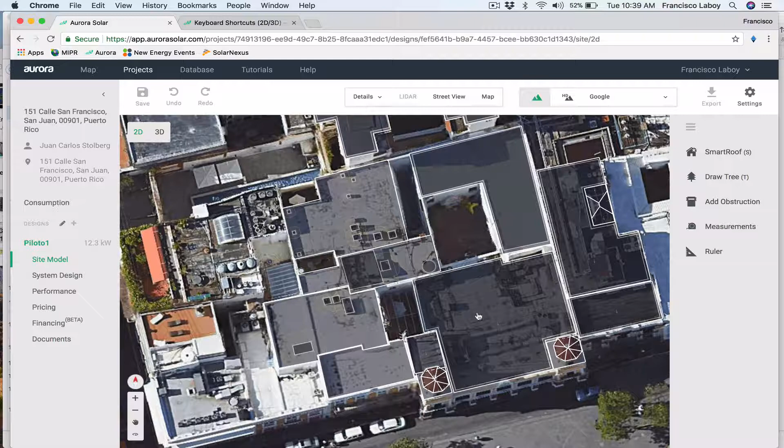This is an aerial view of Piloto, this area here. The areas in gray are the different buildings or sections of Piloto. This is the lobby patio, this is the central patio, this is another one, and there's another here. This is the next door neighbor with his internal patio, and this is city hall, if I'm not mistaken, with the towers here.

What you see here are obstructions: air conditioners, the cage area in the middle, and the water cistern. We also have poles with cables, which we'll work on to make sure they don't become an obstruction for the system. This is the new big power generator, which isn't shown on this aerial view of your building, but we're making sure it's part of the equation.

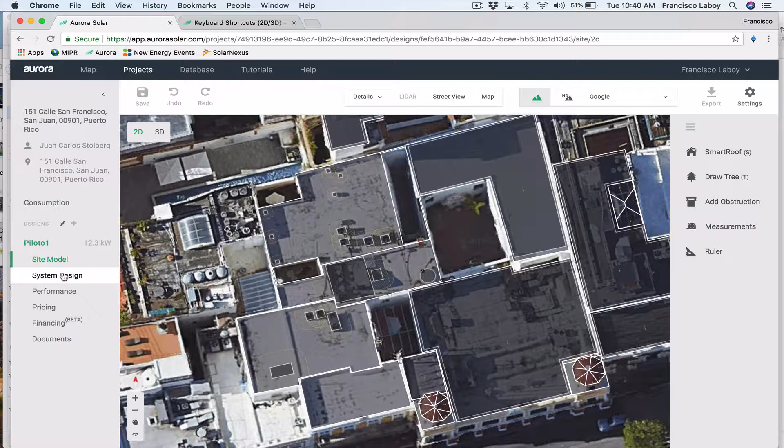Now I'm going to go into the actual design of the system. I'll show you the irradiance map. As you can see, we have multiple buildings around yours, and the reason we put these buildings here is to account for any shading situation at different times of the day and different times of the year.

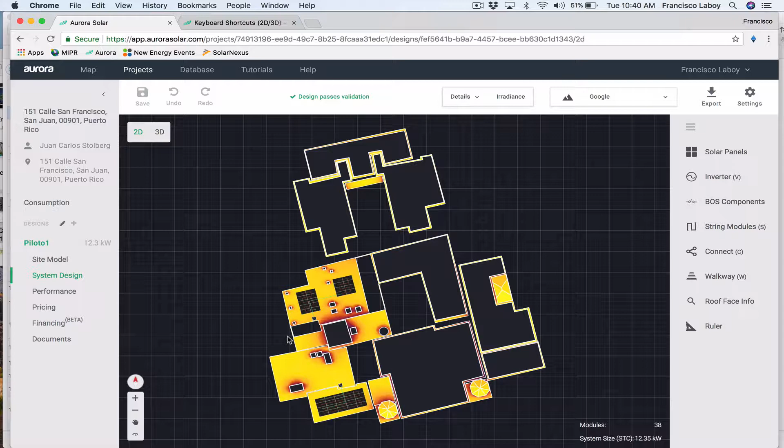As you can see, we're showing very clearly what your building looks like - what area your building covers, the roof, all the different areas within the roof, and all the different obstructions like the air conditioners, smaller conditioners, pipes, generators, cistern, and the cage area. They're shown in black, with shading around them.

Depending on where I put the cursor, this map gives me the irradiance for each individual square meter. So as I move the cursor here, I'm going from 1,788 kilowatt hours per square meter per year, and the closer I get to those shaded areas, that actually goes down.

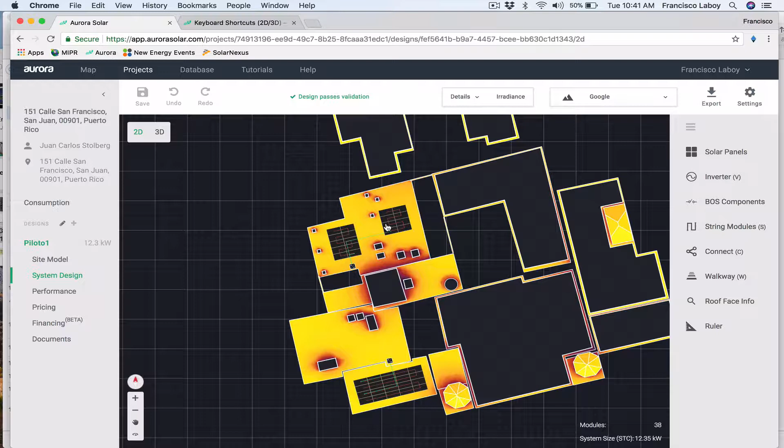So we need to make sure our panel system, the solar array, fits in areas that can use the most out of the energy generated from the roof. We have three different arrays, totaling 38 panels, about 12.4 kilowatts, using 325-watt panels. The biggest array is in the front, in the southernmost part of the building, right in front of the plaza. The other two smaller arrays are on the back side and the north side of the building.

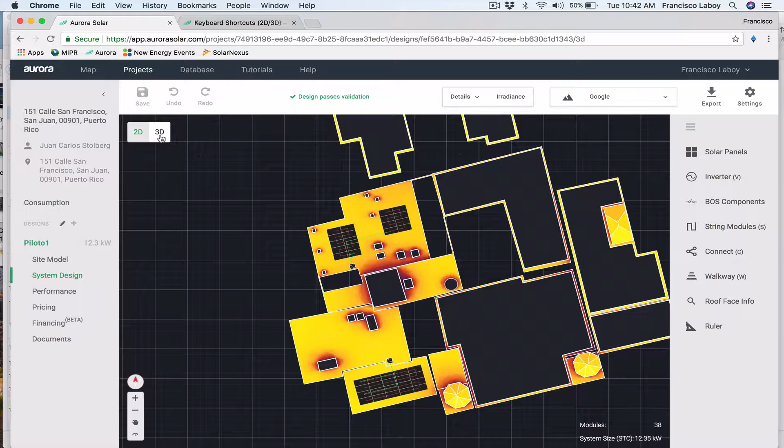Now if I go into the three-dimensional view of this project - give me a second, it's coming up - it will show me a set of information that's very useful for understanding the impact of the system based on the design and positioning of the array. It also lets you understand the physical impact of the different buildings around you.

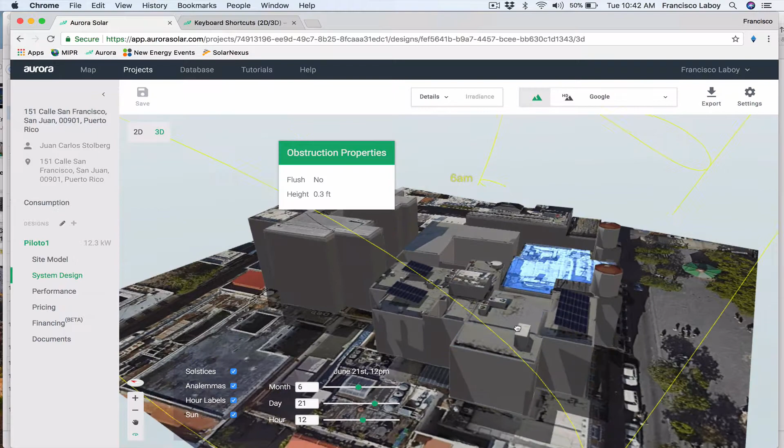As you can see, you have a building right behind you, which is about 6 stories or so. You have another one a little higher than yours here, but not that high. And this one further to the east is a little bit higher. But they don't constitute any shading issue, to be honest.

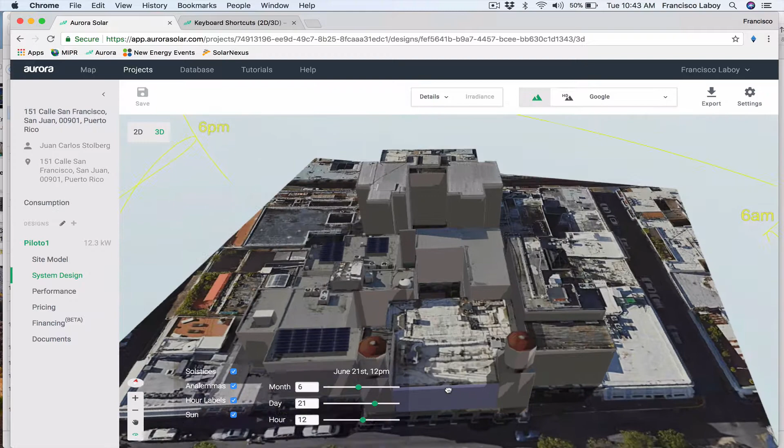And the way we know that is using our system's analemmas - I'd say not reporting, but forecast. Analemmas are basically the position of the sun in relation to the position of the earth and the time of year. These are the northern analemmas, which relate to the summer solstice, and these are the southern analemmas that relate to the winter solstice. I have a date of June 21st at 12 o'clock, that's summer solstice. If I change this to December 21st at 12 o'clock, that's winter solstice.

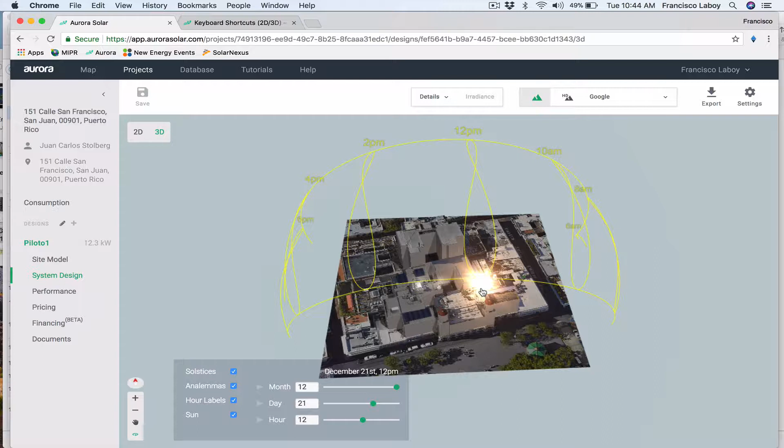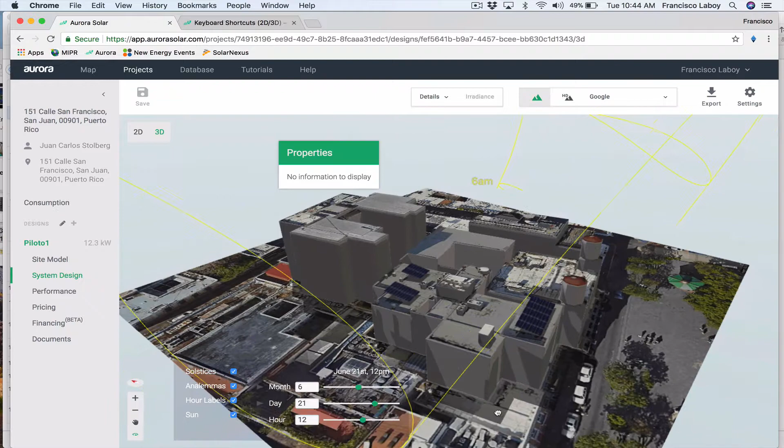Notice how the sun moves east to west on a southern trajectory, whereas during the summer it does so through the northern part of the hemisphere. So if I go closer to the system here, notice how the arrays are actually elevated, since some areas within the roof are lower than others, especially the northern side of the building.

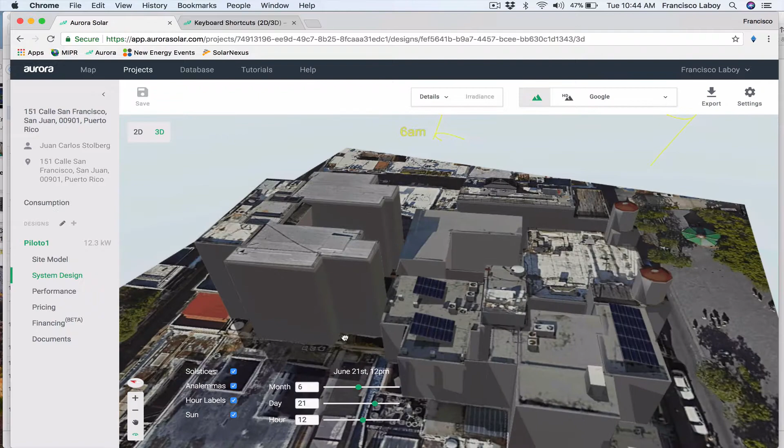That's why we're actually considering a height of about 3.5 to 4 feet for the arrays. Something similar to a carport, but with the provisions of doing it in a roof. Same thing with the backside solar panels or solar arrays.

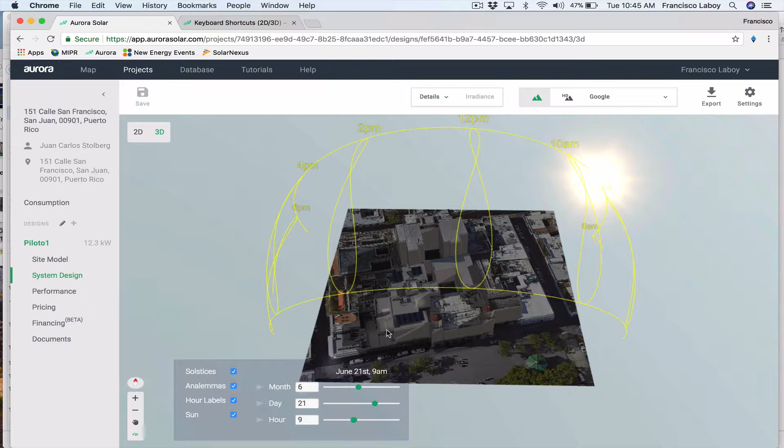Now, if I was to get back here and take a look at how the sun moves from east to west, on the summer, it's 6 o'clock in the morning. Just about 8 o'clock in the morning, we might start seeing some production. Very little shading, but by 9 o'clock, we already have production going on.

Again, shading from the different elements, like the towers, the buildings next door, the building in the back is negligible. Same thing in terms of the obstructions in the middle. This is the caged area. These are the air conditioners, the cistern, and so on.

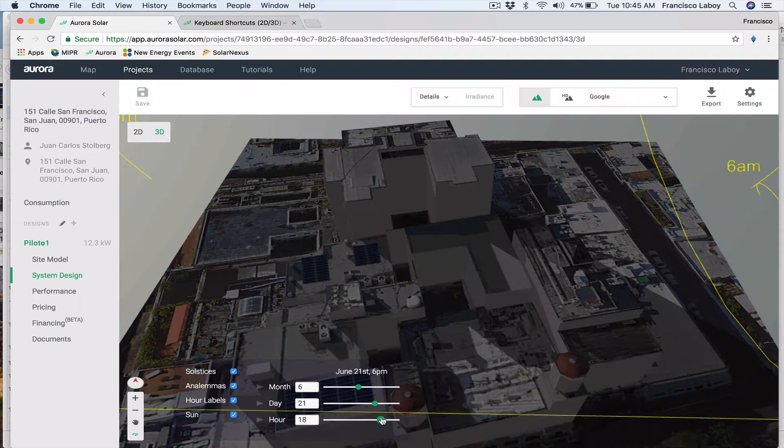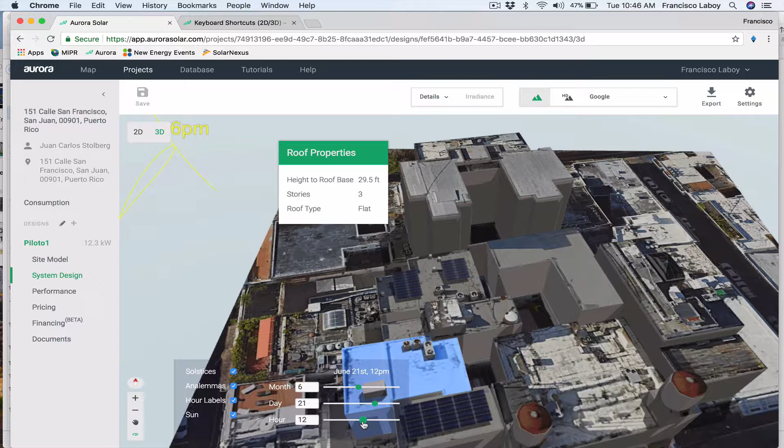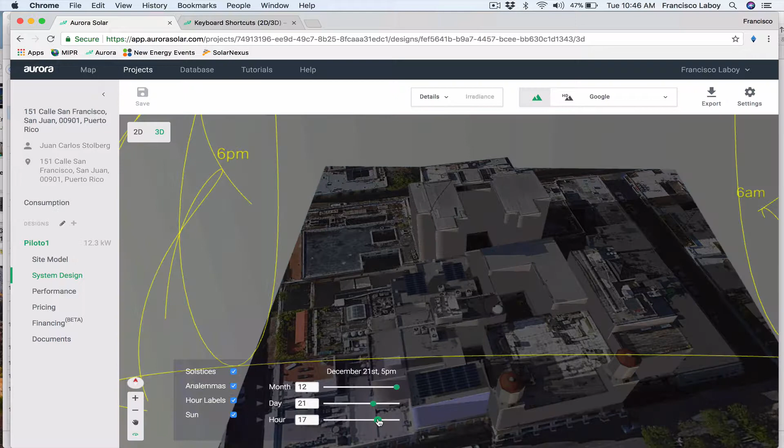Now, if I was to change this to the month of the year all the way to winter solstice, notice how now my shades change a little bit, but not so much. Just about 4 o'clock or so. Same thing, it's just that there's not as much sun as there was during the summer. At 5 o'clock already, it's getting dark.

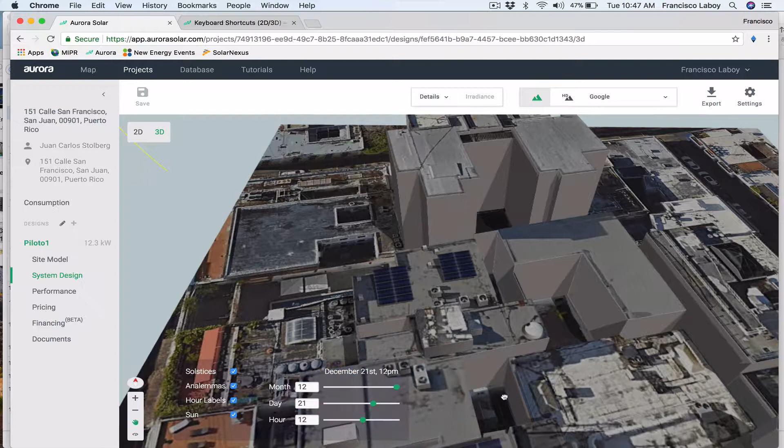The amount of irradiance during this time of the year is much lower. However, in the case of Puerto Rico, that actually doesn't end up as detrimental as in other places in the world, because we don't have as much cloud cover during the winter. It's much more dry. Therefore, it's perhaps a better time to generate electricity.

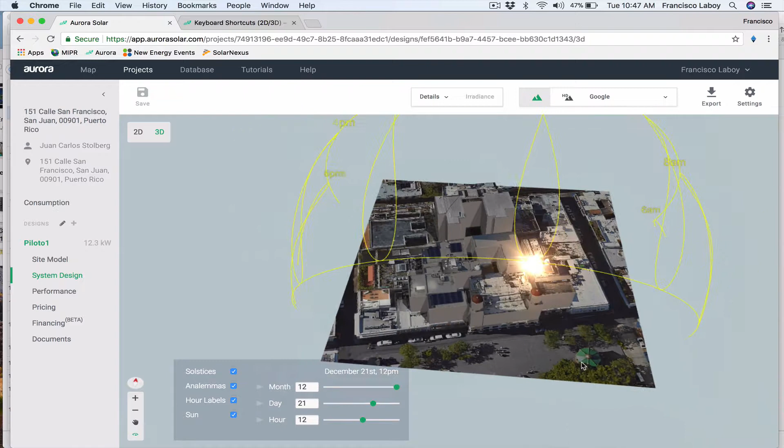So basically, that's in a nutshell, what the design is. We have also taken into consideration the use of battery systems to cover for at least one air conditioning, lighting, and all your IP and IoT communication systems. That altogether looks to be somewhere around 2,000 watts per hour average at 24 hours.

That means that at some points of the day, we're going to use the air conditioner, and that air conditioner is going to be working under the system, which is basically what we call a critical panel. We'll basically set aside a bunch of breakers, focus on the IT side, on maybe one or two air conditioners and some lighting elements, so that whenever there's a power outage, your IP and that section in which you have the air conditioner and those lights will continue to work.

There's resiliency. We can actually have a lot of the lighting on the building run on the battery system and on the solar. And in the case of an emergency, the backup would actually allow for all that lighting and the AC and the IT and IP systems to work. Now that air conditioner has to be a small one, no more than 36,000 BTU or so.

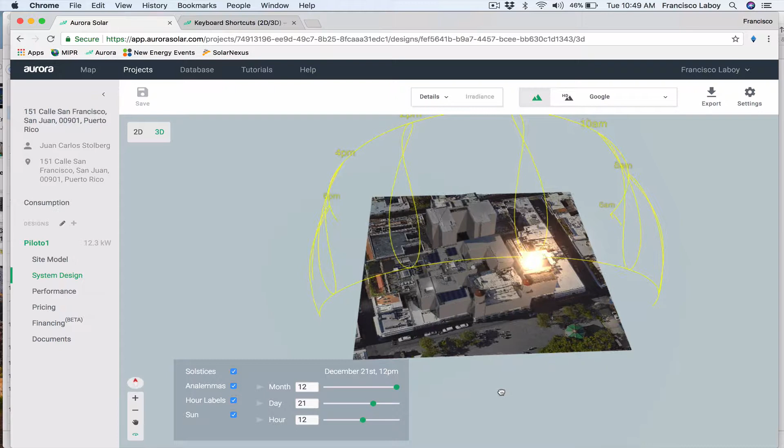We are looking into, our design calls for systems that are capable of handling tri-phase incoming energy, so we can actually interconnect with PREPA, not for net metering though, simply just for the event that we might actually need PREPA for contingency, or also that the system can actually decide from where it's actually going to be drawing its energy at any time during the day or during the night.

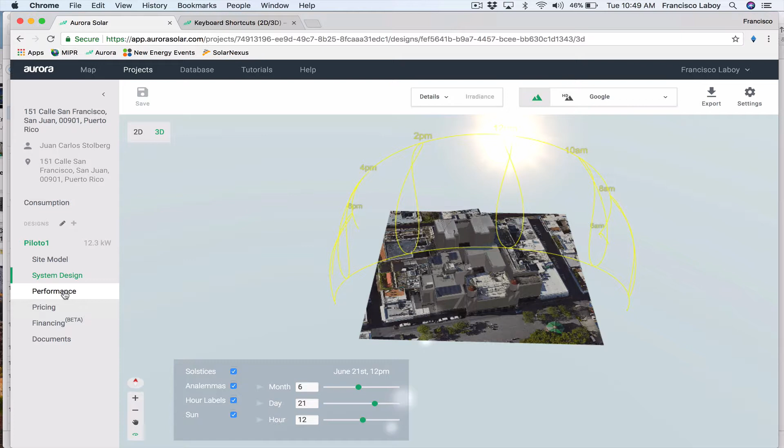Okay, so this is the performance, which is basically how much energy you're going to be generating during the year. At peak time, you're looking at around 1.7 in April, same as June, 1.6 in July, 1.7 in August. This is actually based on simulation based on weather patterns usually affecting the area, as well as heat. Heat is not particularly the best friend of solar energy, and may actually be detrimental.

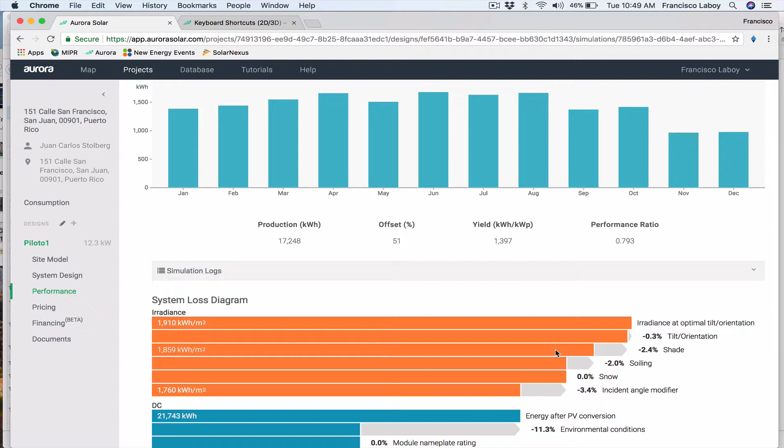So that's why whenever it rains and then the sun comes out, there's a humongous spike in energy production on part of the solar arrays. So this is the system loss diagram in terms of your DC, AC, and others. So everything looks to be up to par.

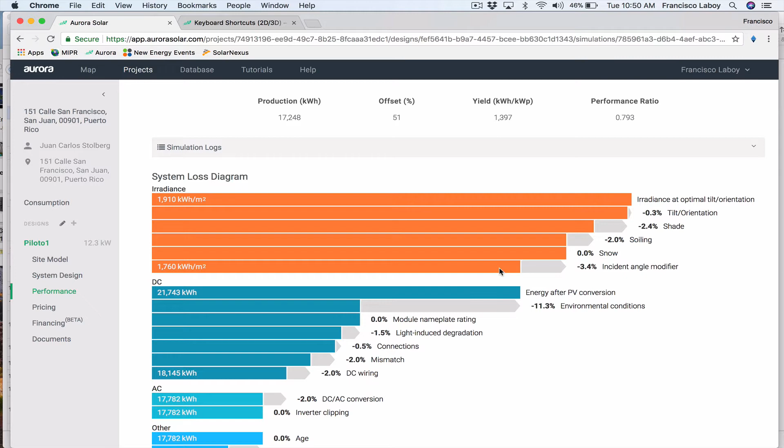All right, so that's in a nutshell, the design. I'll be directing you to another video in a short while that's actually going to explain the proposal itself.